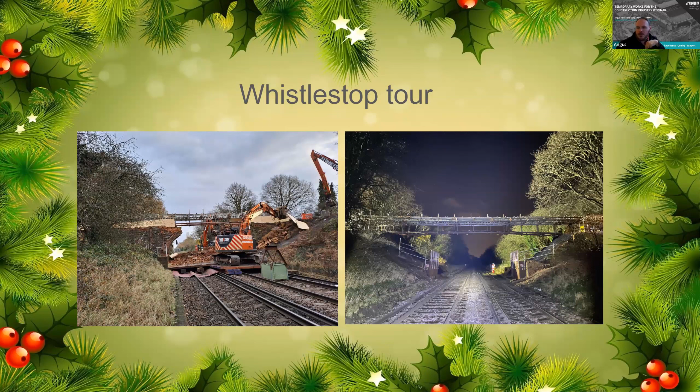We had a lot of bridges last weekend. This scheme was for Sam Evans, who were working for Amco. There were others involved - MHB, PSD, and Alltask. It was quite interesting coordinating all the works between ourselves under tight time constraints, and it worked very well - the bridge came down successfully. The scaffold bridge in place supporting the services that had to remain was itself quite an interesting structure, not designed by us, but interesting - the pipes aren't hanging below the beams, they're offset. Quite an interesting project all around, that one.

We also had St John's Footbridge come down last weekend. This was struck by an RRV, and the weekend before last we turned up on site on Monday. By Tuesday evening they had a full demolition scheme in place that we produced, and the works were successfully completed on Saturday night. Quite a simple one, but nonetheless challenging timescales, and it all went safely, which is the main thing.

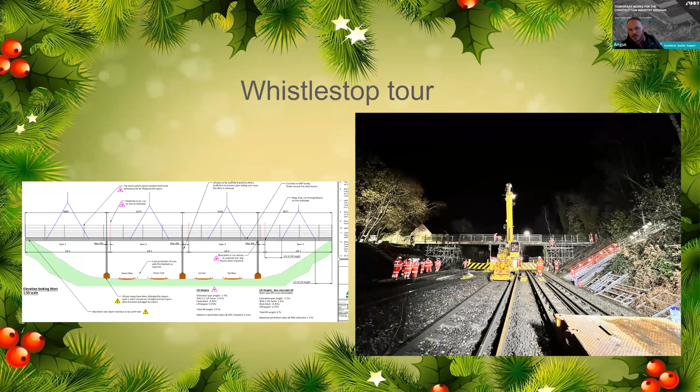Similarly last weekend we had the M3 Bagshot Bridge come down, which was for CDC, Clark Demo. It's very pleasing to talk to your client on Monday and find out it went exactly as the predictions and drawings we put together.

You can see here the demolition phase - they've just taken out this span because of its nature, a very long, slender span. Instead of trying to take a lot of weight out of it, we hinged it and failed it, dropping it onto rubble, and that went very well, which is a testament to the guys on site.

A lot of assets to protect on that scheme, from sheet pile walls to central barriers, telecom services, all sorts. But it all went very well, and some good pictures are floating around on LinkedIn from Troops Plant or CDC Demo.

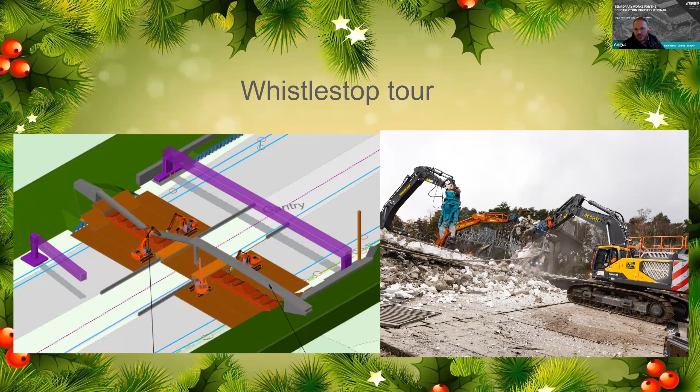A nice one for us, very close to home - this is in Chelmsford, where our office is just outside. This was an old Bailey bridge that was removed. The reason it was lifted out is because the council, in their infinite wisdom, wanted to keep it, and it's now been dismantled for storage. Folding money says it never comes out of that storage, but that's what they wanted to do anyway.

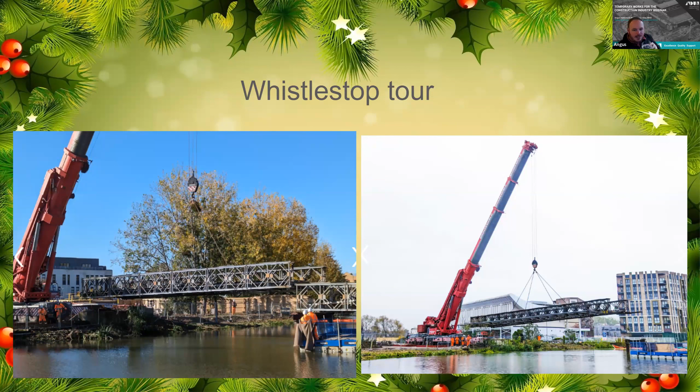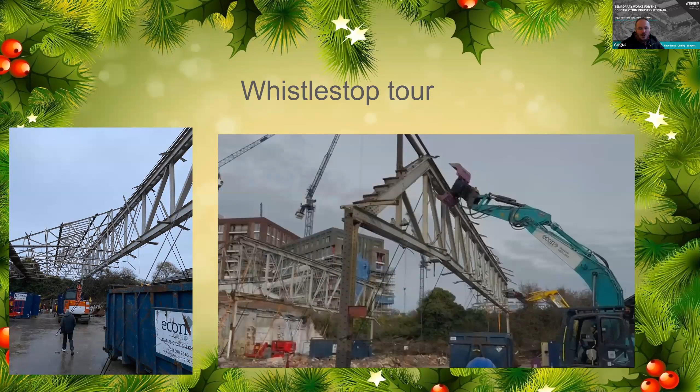Brighton and Hove for Econ - this was an old bus depot, the first phase of it coming down. Some quite large span trusses to bring down. Originally we looked at cranes, but because of the interface with the railway and space on the site, we pushed down the route of pulling over the structure instead. So we stripped out the trusses and then folded them over. I can't show you the video because there's too many people squealing in the background, so I'm not going to show that.

This one - if you tuned into last month's webinar on post-tension structures - is a post-tension bridge, Fence Lane, which came down successfully a few months back, but an interesting one nonetheless. It was for Sam Evans, working for Balfour Beatty.

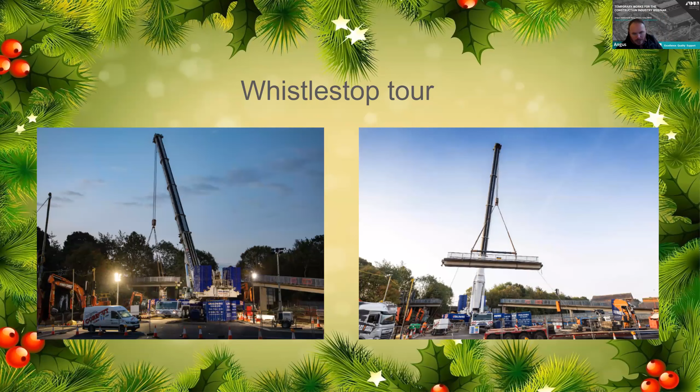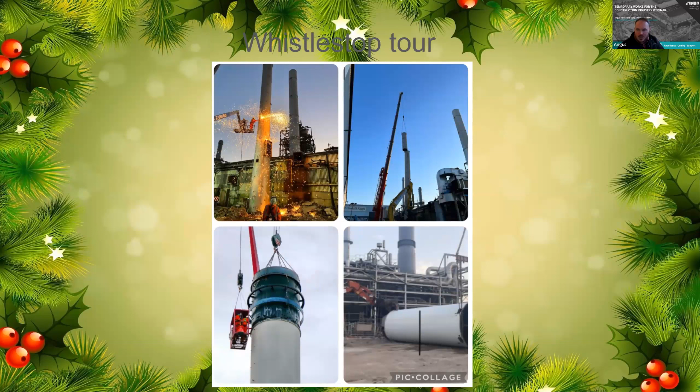That went very well. This is Kemsley Paper Mill, where we were working with Econ. This is just a stack, but there was a lot more work that went on there - an awful lot of material removed by the Econ team in quite a short period of time. Some good pictures of the stack coming down.

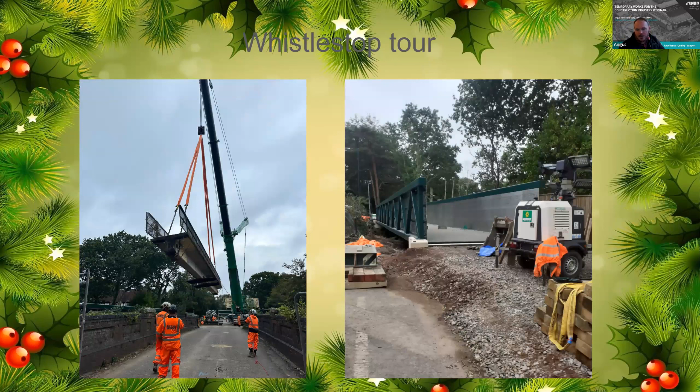Another post-tension structure came out a few weekends back, which you can see being lifted out on the left, and you can see the new bridges going in on the right. We did the demolition and the temporary works to facilitate that work, which was a good scheme.

This one was a ballasted tower crane grillage that we were asked to design to situate on a structure in Manchester. Very tight timescales again to get it all designed, fabricated, and installed, and it all went really well to plan. A nice little job. The photo on the right is prior to the Kentledge going on.

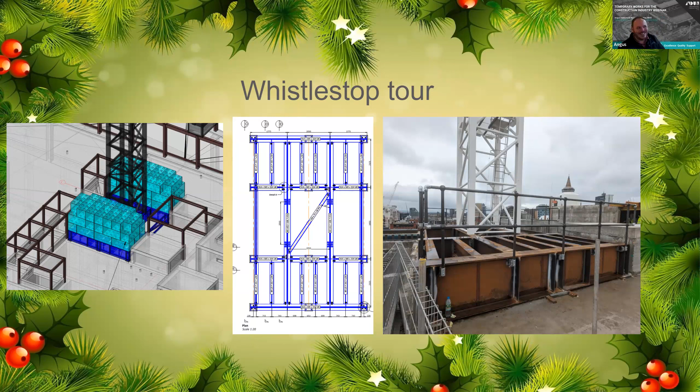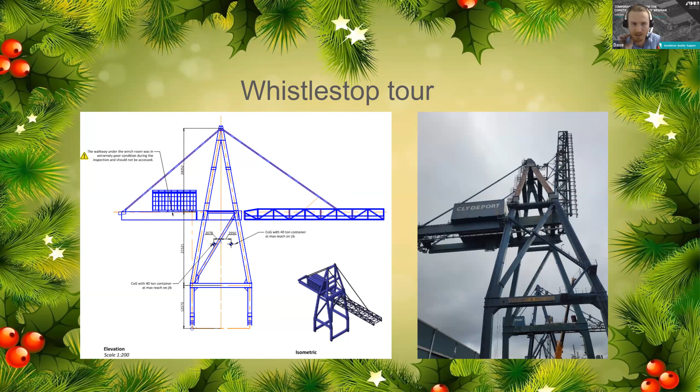The next one, I think I've done a webinar on this year, is the dismantling of the container crane at Greenock. It was quite a challenge to come up with all the weights as there were no archive drawings. It came down on schedule pretty much given the weather constraints, but a nice project.

Another tower crane grillage over in London for a fairly sized crane. We did all the design for Construct It, who got it fabricated and installed. You can see the Shard in the background there, which shows you roughly where it is.

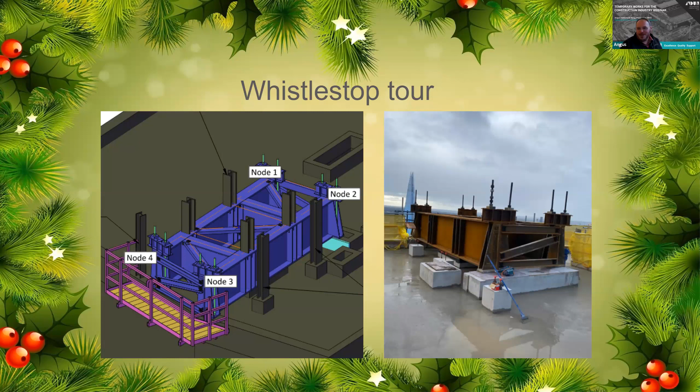I was a bit worried about putting this presentation together because I've changed my phone this year and wasn't sure if I'd be able to get my WhatsApp messages, but strangely I managed it. It's amazing, isn't it, that our politicians can't manage it but I managed it. Anyway, enough taking the piss out of Boris Johnson.

Now we're taking out the old M&S and Dorothy Perkins, which sits above the river - you don't realise when you walk through the high street in Pontypridd. It's situated just where the River Taff and another river meet. If you're familiar with Pontypridd, you'll know it floods fairly regularly, and when it does, it really does flood, with some significant water level rises in the area, which was part of the challenges with this scheme.

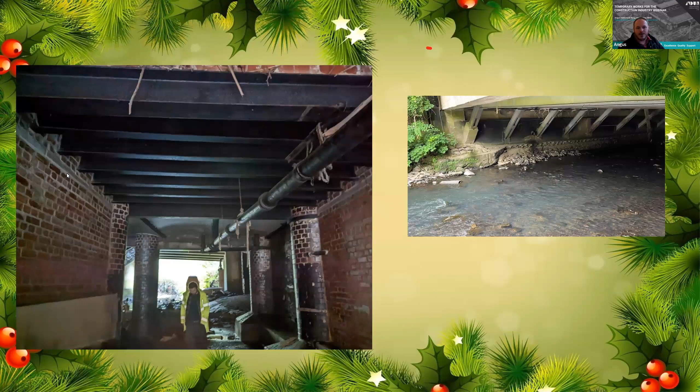Underneath there, that's what the bridge looked like - all sorts of different arrangements of structures, from the large span here to the short span spanning onto masonry piers. It was a right old mixture of bits and pieces based upon when things had been built. So it was a mess of a structure, and that kind of shows what we had to take down.

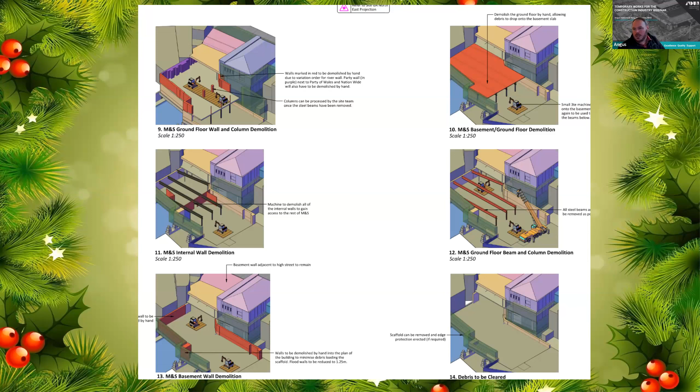And the demo sequence, we basically worked our way in from the rear, the riverside, taking out all the small buildings first. There were some very significant steel beams in that structure, very lumpy, and it was quite a strange structure in terms of stability, because a lot of the steel beams sat onto very slender steel piers, and there wasn't a great deal keeping it all together. So keeping it stable in the temporary state had its challenges for the team on site.

You can see that a lot of the work towards the rear was done with a high reach until the decision was made to keep the rear wall to become part of the flood defences of the town, and we had to change to manual work to make sure we didn't crack or dislodge it. But we got a good chunk of it down with the high reach to start with.

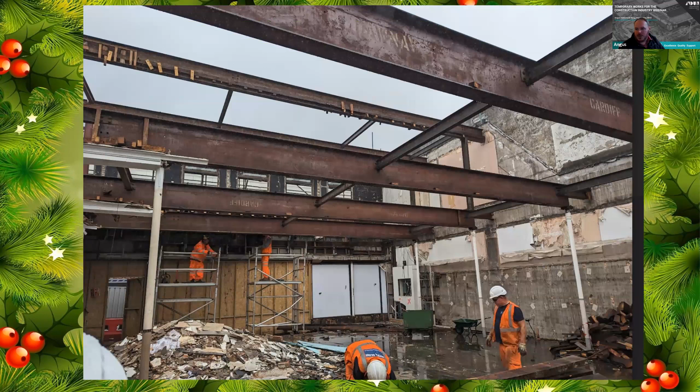It gives you an idea of the scale of the building we were taking down here. This is some of the smaller beams present in the building, but you can see the spindly columns they sat on, and you'd think it was tied to the concrete wall next door for stability, but it wasn't. The whole thing was very lively and definitely relied on the diaphragm action of the timber floors for stability, so it took some careful work on the part of the teams on site to bring it down safely.

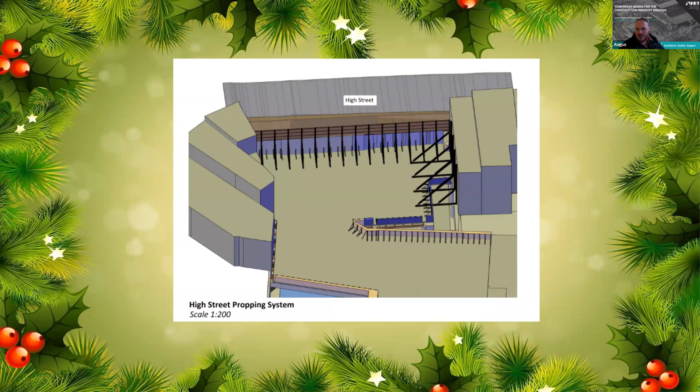And there you can see the scheme - the whole building's gone now. It's made a big difference to the site, or to the town itself. You can see the party wall support on this side, and I don't think the hoarding was in at that stage, but it's been an interesting project.

Quite a few site visits. I think James and I have both been down there a couple of times to see what's going on and how the project has been developing.

And you can see the front - unfortunately they still kept part of the horrible facade, but still a big improvement. I think the final solution, what the council are trying to achieve, you can see in the background up there the station. So there'll be an entrance from the station that will come all the way down through the former bingo hall site, and then across where the M&S sat, and then that takes you out to there's actually a Lido in Pontypridd and some quite nice gardens out back.

Hopefully the council succeed in it, and it does what they hope, because... I don't know what I was going to say there. Anyway, kind of went off on a tangent there.

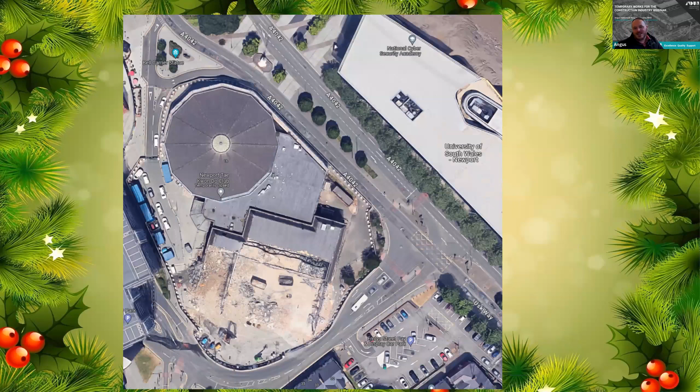Anyway, so the next one is for Waters again. This is Newport Centre, and you can see that Google have again caught the demolition just after it started, which was quite interesting, even in 3D. It looks like the trusses are floating, but they definitely weren't floating. It's interesting to see they've caught this midway through the demolition, and it actually shows exactly what we did.

We started at the back of the structure, which was the old sports hall, and that had some very, very large steel trusses in it. Thankfully, when we were on site...

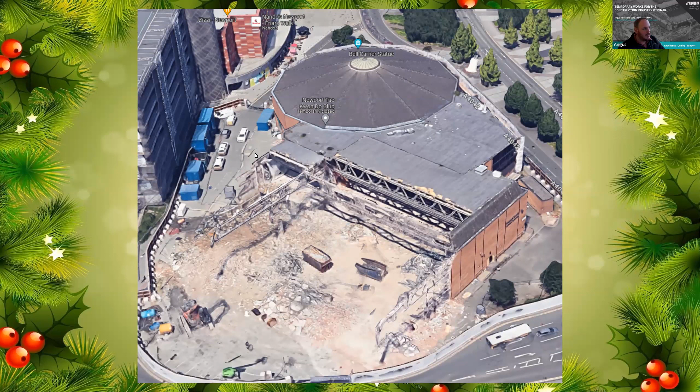Once they won the tender, after tender, we found up in the old air handling unit rooms all of the structural drawings, and then a month later, the council found another load of structural drawings. So we were able to confirm the makeup of the structure and the weight of the trusses based on the SI that we did and the drawings that we had.

Interestingly, the drawings we had were clearly changed because there was a truss missing from the design compared to what was actually built in the structure. But with the SI we had, we were able to go through and verify the weights and the makeup as it was.

Luckily, if we'd just worked off the drawings, we would have told them there was one truss less than there was. As I said, we worked our way from the back of the structure through, taking down what we could with a high reach and then lifting down the trusses.

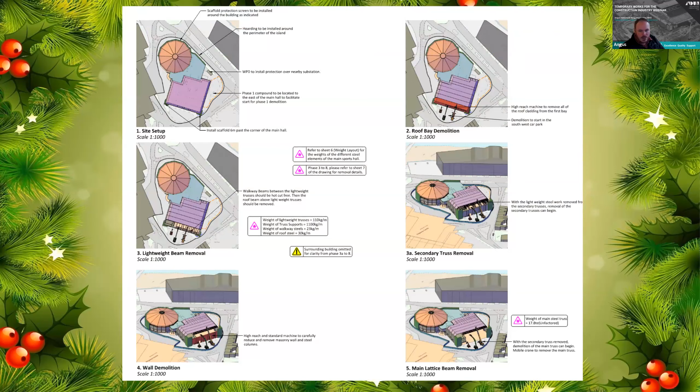Did weight takeoff as the trusses came down. As I said, you can see there the arrangement of the steelwork within the building, fairly significant. Plenty of scrap money, so Waters were very happy.

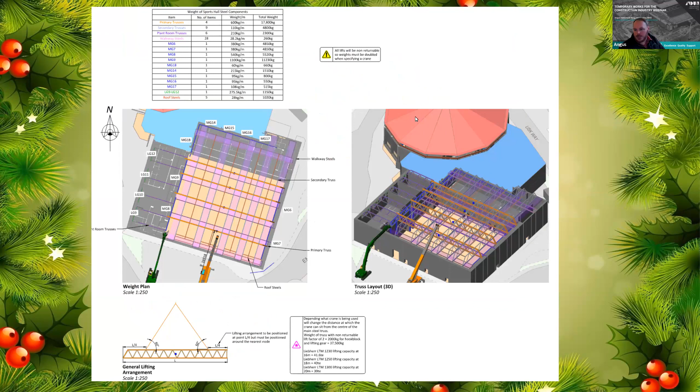Probably the most technically challenging part of the demolition was taking down the old pool hall at the back, as you can see in red there. So we did weight takeoff on a demo sequence, fully analysed to demonstrate how we could take it down.

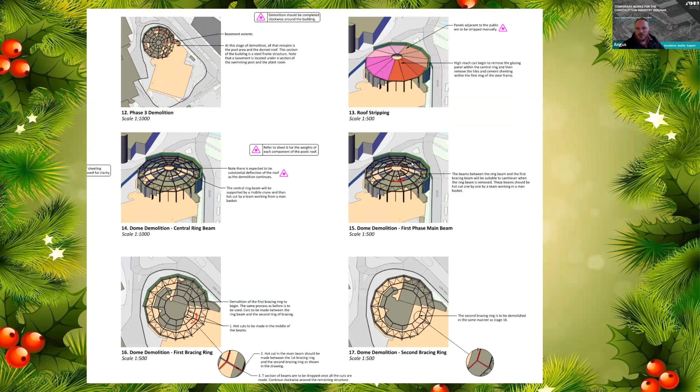I think Dave did that, didn't you? Did the bulk of the engineering on that one. Yeah, and then a nice demo sequence which showed exactly how to do it, which is to cut out the spider in the middle. Strip the roof first, cut out the spider in the middle, and then work your way around, taking the weight out of the structure.

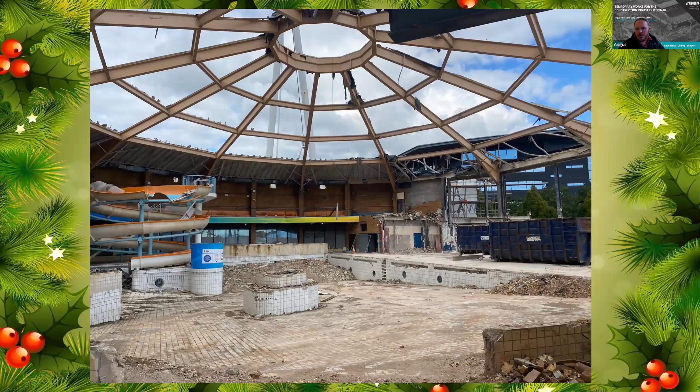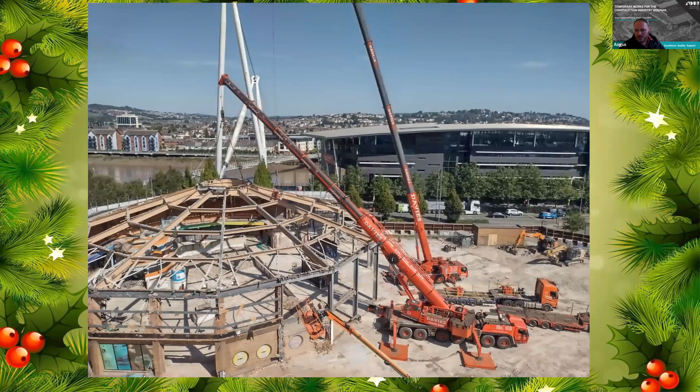Then a pair of cranes, one to lift and one with a man-riding basket, was used to lift out the spider in the middle. There's a video on Twitter that Walters put up if you want to go and see it.

I couldn't figure out a way to get it into the presentation, so the right hand side is just a still from it. Suffice to say it all worked, and the structure behaved as we expected, which was hardly surprising as it turns out, because that's the way they built it - it was pretty much the reverse of what we did, but we didn't know that until later on.

Now Dave's going to take us through this one. Yeah, so I was going to chat about the chocking frames at Leadenhall. Leadenhall is a new structure in London.

You can see Google's captured it when it's just a hole in the ground there. We were working for Construct It, but the principal contractor was Multiplex. So highlights for both me and James, who've done the majority of the work there, have been 2 internal climbing cranes, which we're going to talk about now, and done 3 other grillages for the cranes on site, along with other sections of work.

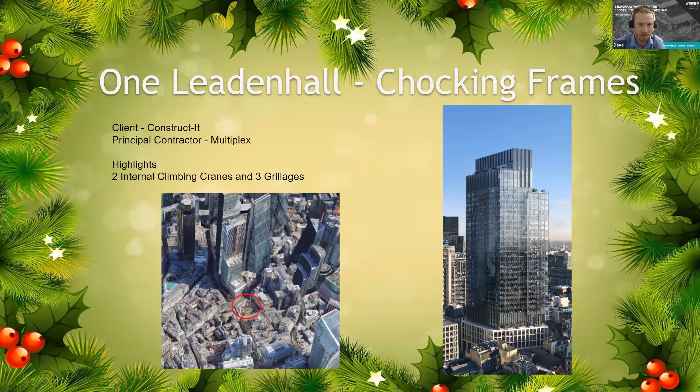So the chocking frames - if we move on, we can see what we're talking about here is a crane that's essentially floating within the core. We provide lateral support at 2 points - you can see if Angus flicks the button - and then we need to transfer the vertical weight from that crane as it moves upwards to the core, and that allows it to climb up.

Over the course of the construction of the building, we climbed the cranes about 10 times. So our challenge was to provide both lateral and vertical support that could work within the tolerances of the core, and allow these cranes to operate with some fairly sizable loads.

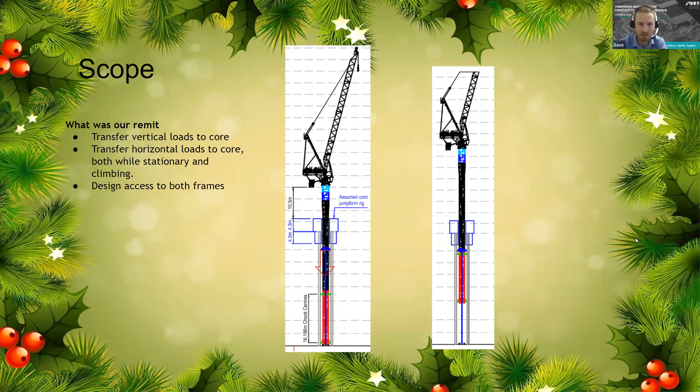They're not small cranes. So, what we designed - we started this back in mid 2021, so it's been quite a long design and build and install process, and now they're all fully finished - was 4 unique frames. We were limited by the jacking capacity of the actual cranes themselves for the weight.

We also had to deal with the vertical support beams, so how to transfer those vertical loads to the core. We had to make them retractable so that we could move them. And then we also modified - TC2 had some inbuilt climbing feet that were almost the right size for the core, so we had to modify them. And we designed some trailing decks to provide safe access for the crane driver, inspections, and to allow them to be installed.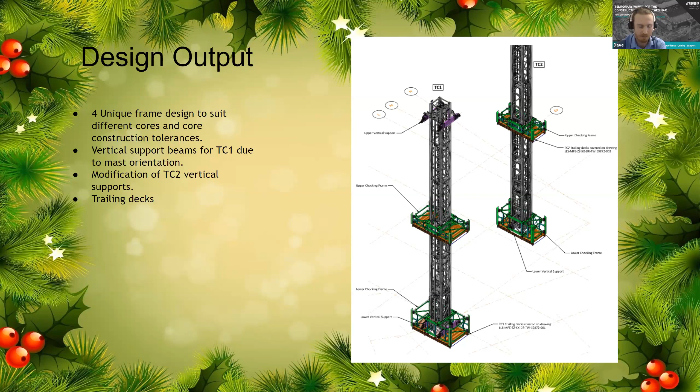If Angus clicks a few, you can see a few of the 3D models of these. It was quite challenging to design something that could be installed and could provide the kind of tolerances that we needed. We also installed some jacking feet you can see there that provided the adjustment, and then the vertical support beams that are the pink ones shown there, which transferred the load up.

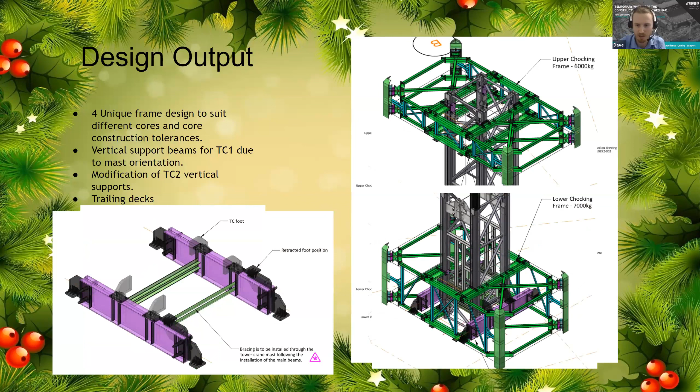I found taking pictures of this very challenging, given we're in a core, and the pictures again don't really do it justice. But it was very hard work to get this installed and to design it so that it was constructible and could be moved around as easily as possible.

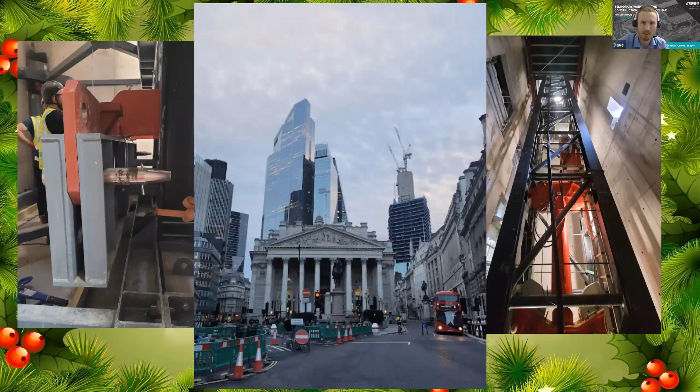It was tough the first few climbs, but after that they got into a rhythm and it worked really well. This was when I was last down in London a couple of weeks ago, and with the cranes pretty much topped out there, you can see the rest of the structure coming up behind.

It's definitely been a challenging project, and I think we're going to do a full webinar on the engineering behind it next year. But it's been one of my highlights of the last couple of years, designing and managing the interfaces on this one. I think it's a highlight, one of the most technical things we've done, actually, Dave, isn't it?

Overall, as a business, it's been a really interesting scheme to develop, and you've done the bulk of the work on it, that's for sure. And the cranes are out on their grillages on top of the structure, which has been their own little challenge, but it's been a very nice little project.

I'm now going to run through Josh's project, his favourite project of the year, which is Fiddler's Ferry and the blowdown and other associated work we did. So we were working for PP O'Connor, who are the main contractor on site. SES were doing the explosive side for the blowdowns, and the overall client is Peel.

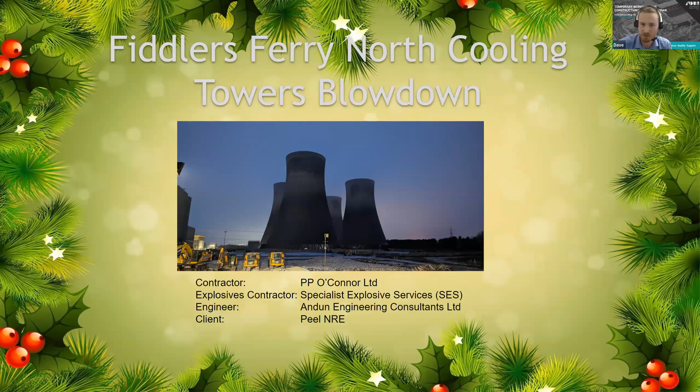So the works we did, it wasn't just the cooling towers. We were working on the northern cooling towers and the whole coal yard. There were quite a few conveyors and things that had to be brought down as well. Josh has taken yet another selfie there, which shows the extent of the site behind him.

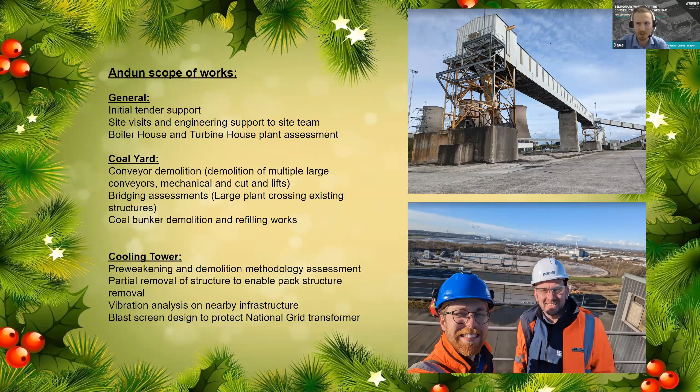We did demolition of some large conveyors, bridging assessments for plant crossings, and a whole bunker which was demolished above ground level and then backfilled below ground level. And then the cooling tower, which I'm going to speak about in a bit more detail.

The general principles behind cooling tower demolition were to pre-weaken the cooling towers with explosives and then perform two essentially cuts. You would remove the columns around one side and then provide a cut further up as well to ensure it was brought down.

There were quite a few elements that required protection. You can see there that we were protecting some National Grid transformers. There were some services nearby. We carried out all the vibration assessments and the protection measures associated with that, along with the pre-weakening.

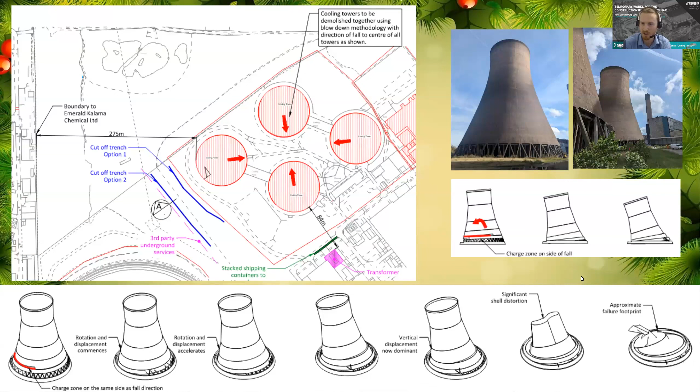The next slide shows some of the assessments we carried out for the pre-weakening. Our role is to essentially assess, when we're installing all these explosives and drilling all the holes in the skin of the tower, is that still safe? Is the tower stable under that condition? So there are some fairly complicated wind load assessments and looking at the pre-weakening works that we did there.

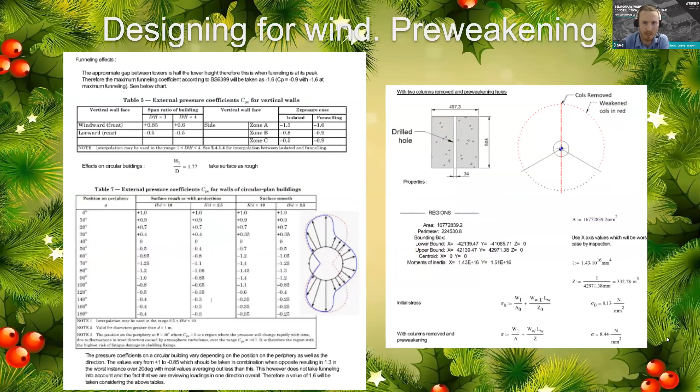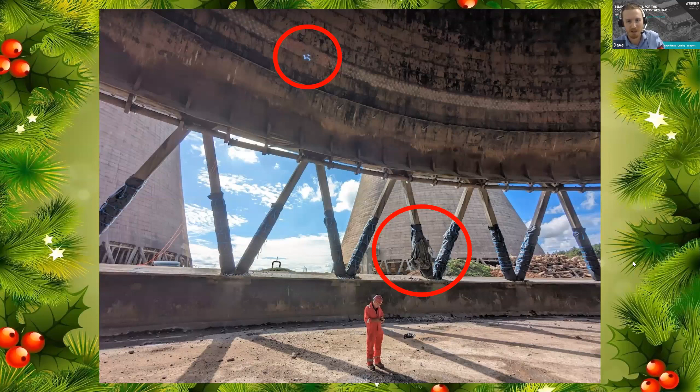The next image shows the inside of the tower after that test blast. You can see it completely removed one column and the blast in the shell worked. We actually reused a lot of the old conveyor belts to form the protection there when we were doing those test blasts. PP O'Connor did a lovely video, although the day was very foggy, so hopefully this plays all right.

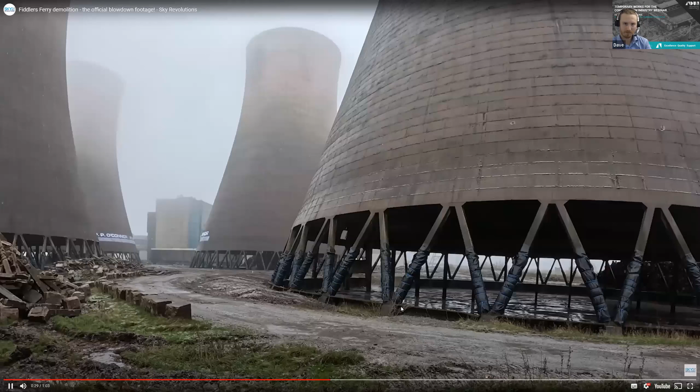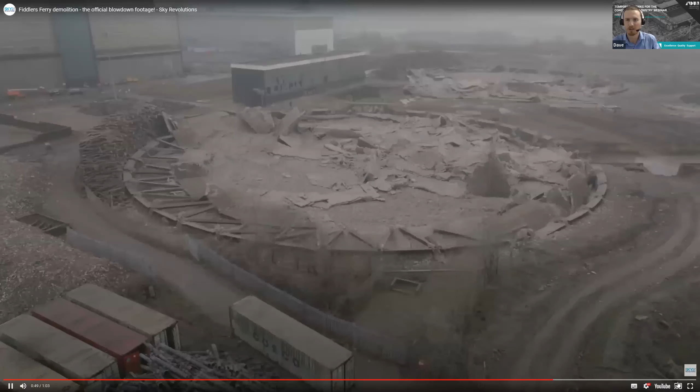That kind of shows the site afterwards. So the only thing that could have been better was the weather really there. So it was another successful project for the year, and it's only just really finished.

Good, I think the next one is Richard's project. I think it is. Oh, we've skipped a good few slides there. Yeah, it's kind of a come down after talking about the big blowdown of the power plants to talk about just a mechanical demolition of a structure, but there's a slot I was given, so oh well.

If you move on. Angus, so it's Laurie House. It was in the middle of Derby in quite a crowded little area. You've got buildings on all sides. Fortunately, the building to the left came down before Laurie House, which is in the green, and in the cross section, the nightclub in blue came down before it as well.

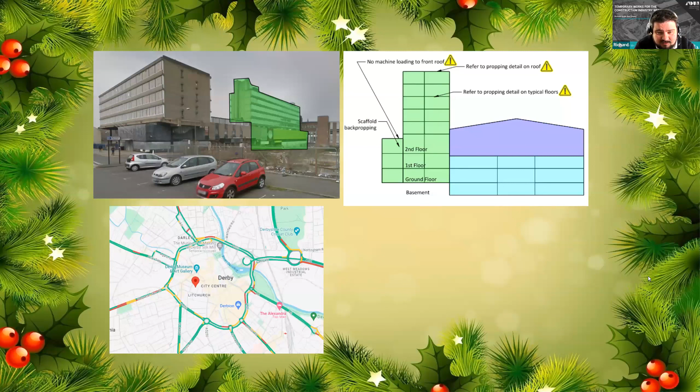But tucked away at the back there, you can see a wee masonry-clad structure that had to stay in, and was very close to the building, which was one of the biggest issues. Laurie House itself was 8 stories, and we had to bring it down mechanically due to the proximity of that building. You can see there's 2 cores in the structure - the south core and the north core, which was right next to that building. There was very little clearance between them.

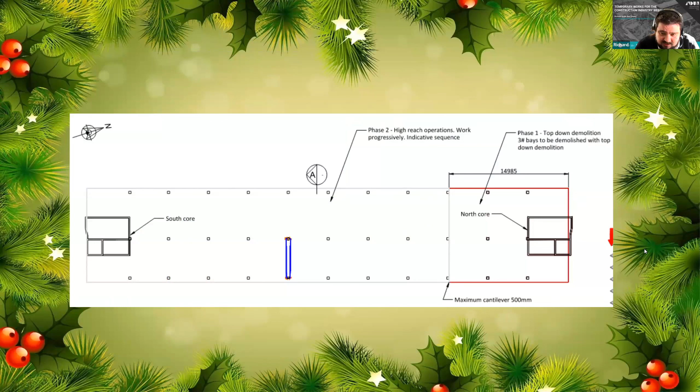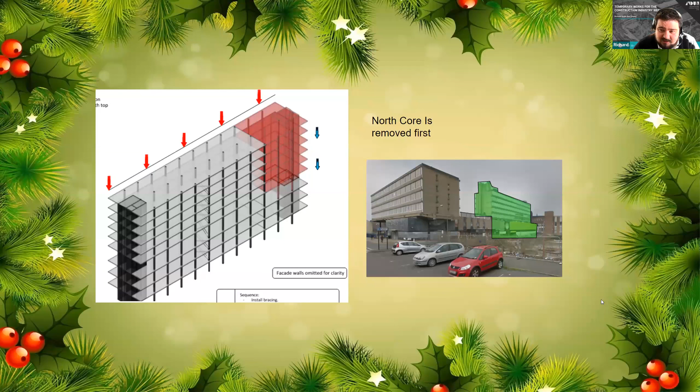So the plan was to take down that section of the building first. If you do that section first and take that down, then if you move along, you're left with quite an unstable looking setup, with no core on one side and just the south core left, which isn't a great idea for stability. But it was just due to the proximity of that building tucked away at the back there.

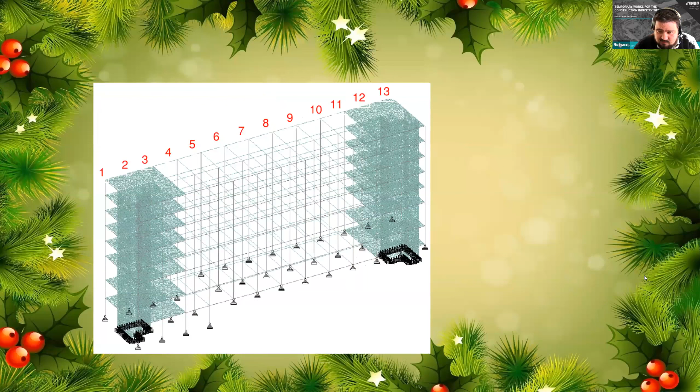So what we did is we checked the structure in an FEA analysis. You can see there's 13 bays, or 13 column lines there, and the first 3 we were going to take away before anything else. When you take that away and move along, you can see we've checked the existing condition of the structure, and the distribution of the loads. It's basically exactly what you'd expect a tower to be under when it's under wind load from one side as well - you can see it's cantilevering on one side. Then when you take away the 3 frames, we compared it to what we were proposing.

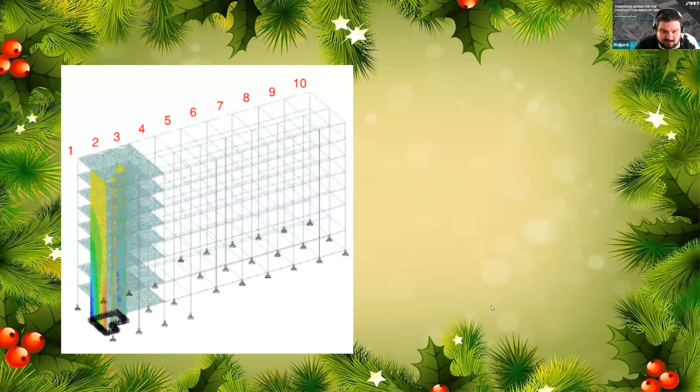Don't move along yet, Angus - move back, there we go. You can see we checked it in the state where the 3 bays were taken off, but in that state the forces in the tower were far higher than was acceptable really. So we devised some bracing that could go in.

And there's the bracing we did - you can see it in bay 6 there, just to lower the loads. If you compare the loads on that to the loads in the existing structure, it was fine. I know the colors don't look right, but it was just a change in the program - the loads were about the same in the existing structure as they were with this braced arrangement.

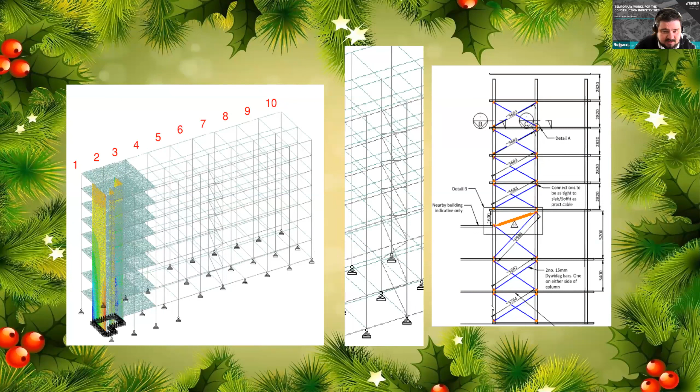So if you move along one more time, when you're doing the demolition from one side, obviously you get to that braced bay first. So we had to also check what happens when those braces were demolished along with the structure. As long as that was stable and the braced arrangement was stable, you could take out the north core first and then work your way to the south, and the building would remain stable the entire time.

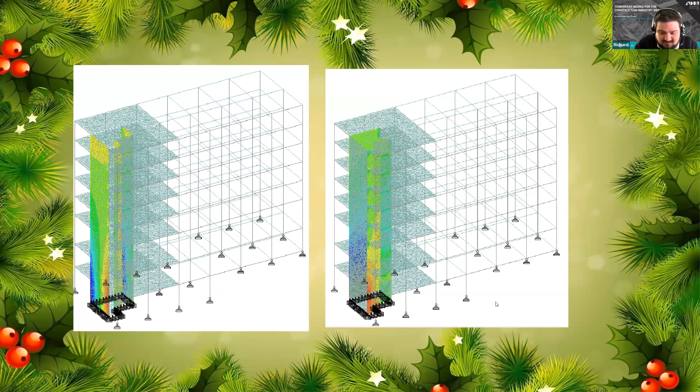Really, it was just a quick run through of how we do the FEA analysis. If you move one more time, you can see that was the design of the braces, I hope everyone can see. Because we already had the full FEA analysis, it was very easy to design the braces - we knew all the loads in it. You had about 11 or 12 tons in one of those braces, so we had to come up with some ingenious ways of tying that into the existing columns, but that all worked out quite easily.

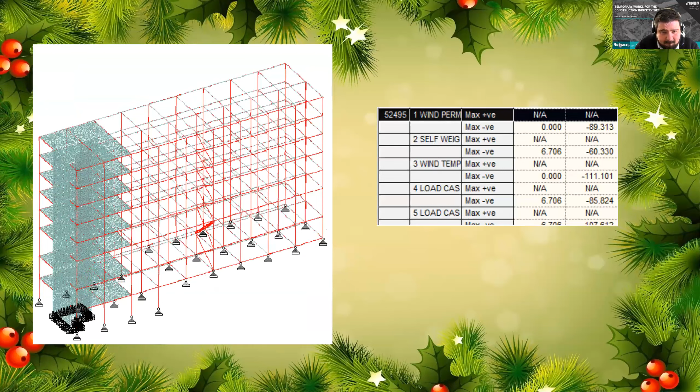If you want to move along, here's one of the great Google images partway through the project. You can see they took down the core at the top of the building, then moved south towards the rest. That's them just after they took out the braced bay, which was a very convenient time for them to get a picture on Google.

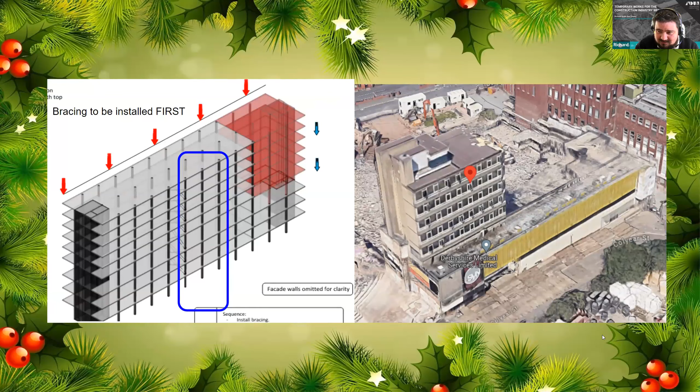And I think I'm passing over to James now. Yes, I am. I'm passing over to James. There you go.

I'm going to talk about the works on Merrion Street with Constructit, which consisted of 2 tower crane tie arrangements. Angus, would you mind moving to the next slide, please? So the construction sequence for the crane, for the project, is shown below.

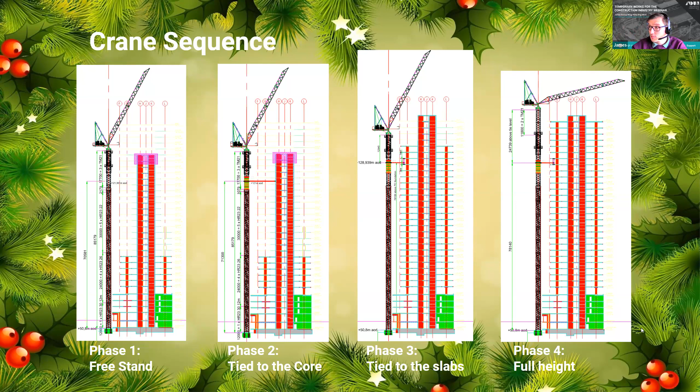In phase 1, the core has progressed up to around 85 meters in height, and the floor construction for the structure surrounding the core is progressing but at a much slower rate. Then, in order to allow the tower crane to service the full height of the core, it had to be tied to the structure because it couldn't freestand any higher than it got to. So we had to tie that crane to the core to enable phase 3, which is the core going to the full height. Following that, we added an additional tie to a bridging column, removed the core tie, and then constructed the final couple of floors.

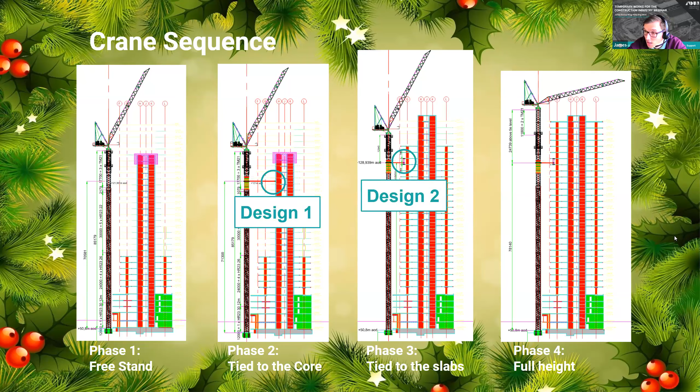Would you mind clicking, Angus? So our involvement in this scheme is the 2 crane tie designs highlighted on the image. The first tie positions and loads were specified by the crane supplier, and the loads were in the region of 300 kilonewtons unfactored.

Due to constraints on site, the fixings had to be post-fix, which is not typical of these sort of connections. Normally you would embed a plate within the core walls with shear studs on the back, and potentially provide additional rebar just to ensure those ties don't break out of the concrete core where you tie into it. But that wasn't possible in this instance, and it made the bracket designs a bit more interesting.

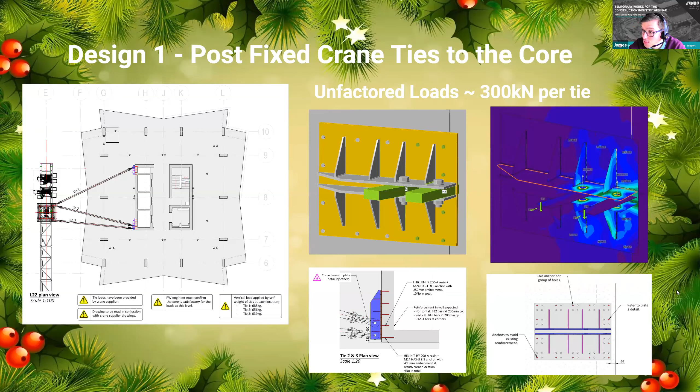If you want to move to the next one, Angus, we can see some photos of the crane in use with the ties installed, which is always nice to see.

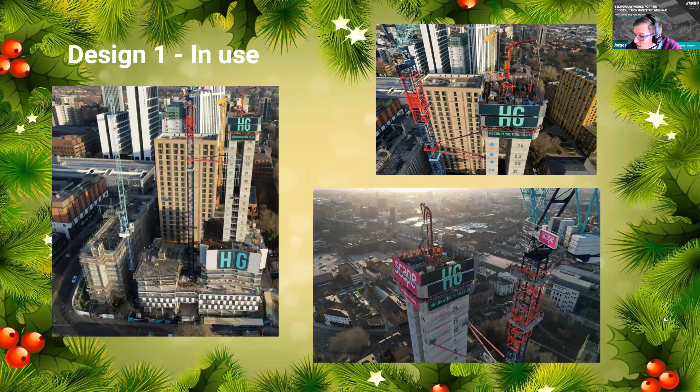Moving on to the bridging column design, following liaison with the client we were able to use cast-in brackets on this design. The installation sequence was to cast in a bracket on level 25, then install the column with the upper bracket attached, and then cast in floor 26. So it was already there and enabled installation a lot easier.

It did come with problems in terms of removal of this column, but that was preferred by our client. They were happy to burn it out rather than have us provide additional details, because we looked into detailing a way to enable this to be removed easily, but they preferred just to burn it out essentially.

But the design of this bridging column was influenced heavily by the stiffness requirements to limit the crane sway. In order to achieve the shear capacity required on the cast-in plates, we essentially introduced our own moment connection at the top and bottom of the connection, because there were that many bolts required that it formed a moment connection.

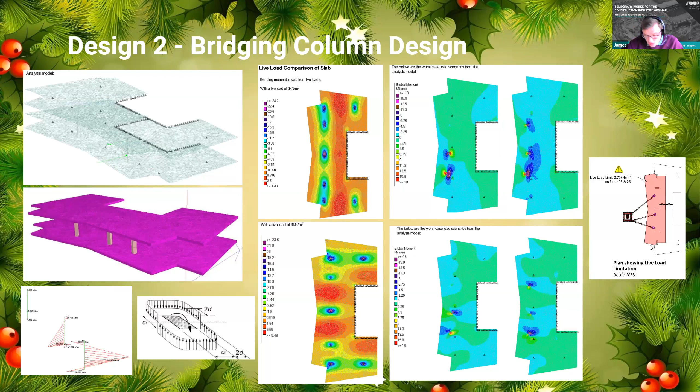And that's the end of my mini presentation.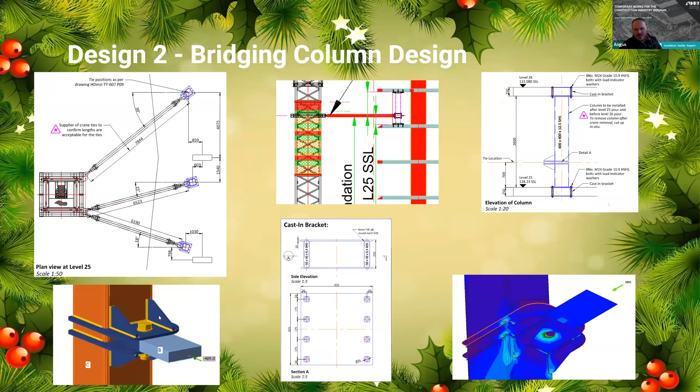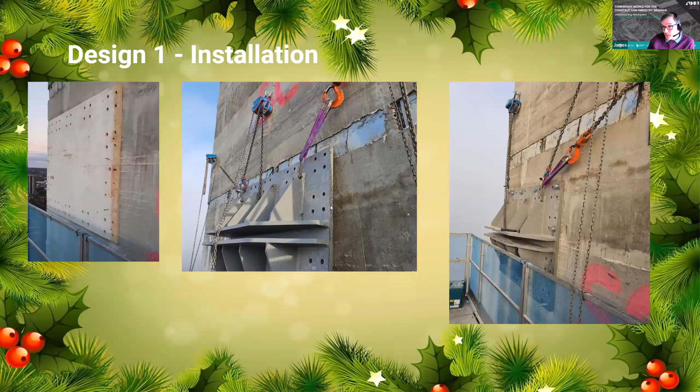There was some interesting conversations we had on this one, wasn't there? On the stiffness of the anchors and the plate, as you touched on. Figuring out how far the anchors will move before they pick up the load. It was an interesting one. Quite a simple one, but actually quite a cool thing to design, wasn't it? It was, and my involvement on this was on that anchor, the Cat 2 check. Yeah. So Chris did the design on this one, and yeah, it was a couple of interesting conversations we had along the way.